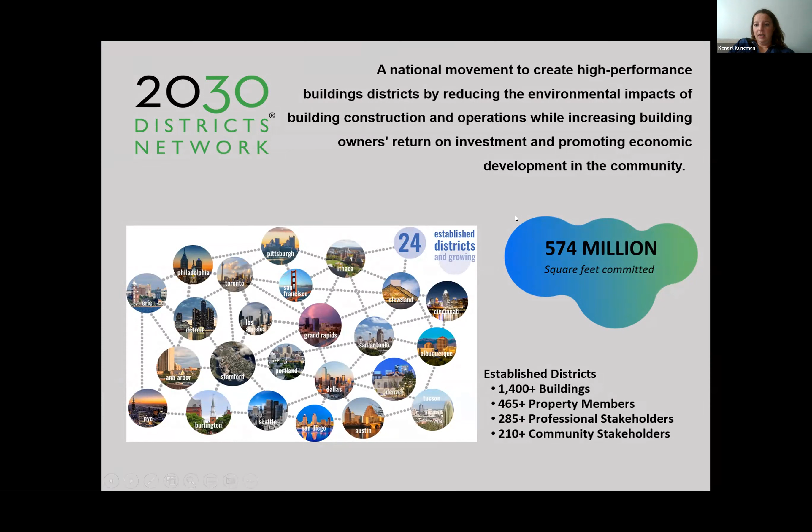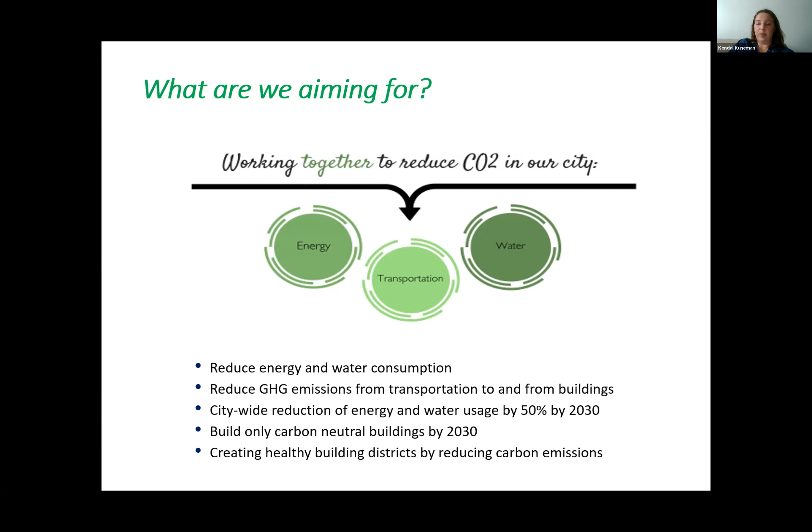If you're not familiar with what the 2030 district does, we're aiming to support our building members in reducing their energy and water consumption. We also help them reduce greenhouse gas emissions from transportation to and from those buildings. So what we're looking at is the baseline energy and water usage, and helping those building members reduce by 50% by 2030.

So how can you join the 2030 district? We do have 3 membership types. Our property owners and managers can sign up to become building members, and it is free to them. We are a nonprofit, so all of our resources are focused on our building members and supporting them in their goals. And then we also have professional stakeholders.

Those are paid memberships, and those are our stakeholders that believe in the mission of the 2030 district and support us with funding. And then we like to highlight our professional stakeholders at some of our events like today, and bring some of these topics that we think are going to be helpful for our building members to everyone.

And then lastly, we have community stakeholders, which I already mentioned. Those are other like-minded environmental nonprofits in Detroit that we partner with.

We do have 3 best practices groups: Venue Museum, which is a national group now, houses of worship, and multifamily. These groups meet about every other month and focus on some of the challenges that their building type faces. So it's been really successful getting similar building types together to have some of these discussions.

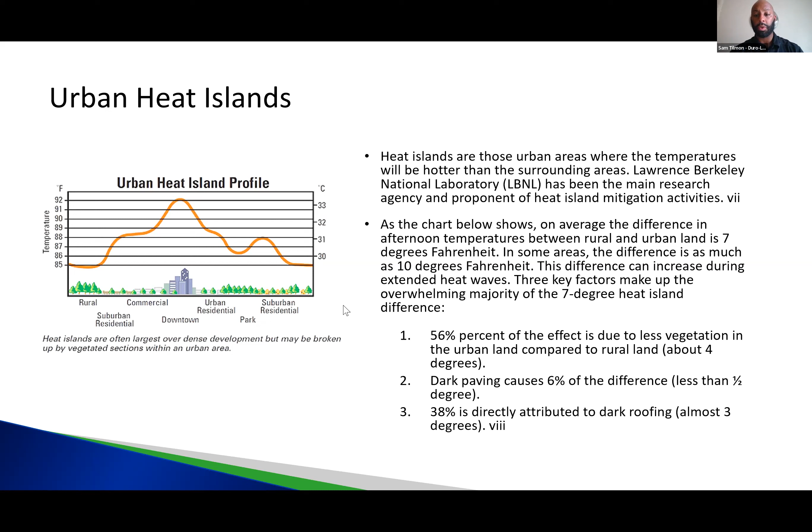One thing to note is that 56% of this effect is due to less vegetation in the urban lands compared to in your rural lands. Dark paving—our asphalt parking lots, our asphalt roadways—those darker surfaces tend to be hot. I do have a graph you'll see a little later that shows a thermography image of a piece of property showing the building and the parking lot, so you can see how hot that pavement is compared to, let's say, the vegetative grass or trees next to it. And lastly, 38% is directly attributed to dark roofing. There's a couple different kinds of dark roofing out there, from black single-ply roofing membranes to old school tar roofs, or some of our built-up roofs that have black coatings on top.

So understanding what the heat island effect is, how it occurs, how it affects us, we have to begin to look at some of our solutions to heat island effects. One of the things I'd like to point out is that most solutions we have are not quick, short-term solutions. Some of their benefits and effects take place over a longer period of time, so it's more of a long-term strategy. Adding vegetation can definitely help your roofing system and help the ecosystem. However, it's long-term—it can require up to 10 to 20, sometimes even 50 years, to completely reap all of the benefits of adding these new vegetative roofing systems.

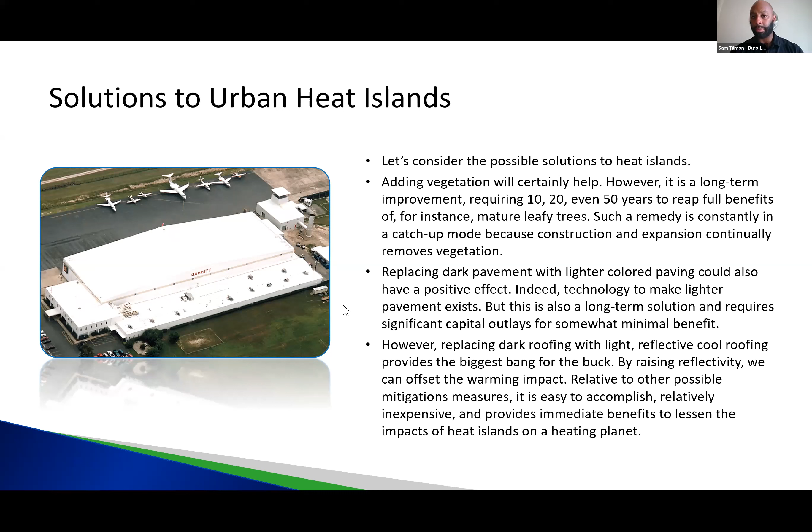Other things you can do: replacing dark pavement with some of the lighter colored pavement—maybe going from asphalt to concrete, which may be a lighter color—that can help as well. Or replacing some of your darker roofing units with more cool roofing units. Now, on direct temperature it has an effect, but it also has other benefits to your building and its equipment, which I'll cover a little bit later.

So cities growing, cities getting hotter. Cities are growing, of course, at an incredible rate. I know here in Detroit, we've just been seeing astronomical economic growth—there's new buildings popping up in the downtown area, and in our suburban area or just outside our downtown area we're seeing new strip malls, new apartment complexes, new residential units. There's so much growth happening, but it does sometimes have an effect on heat island effect or heat trap within our communities.

So if you look at any particular landscape, roofs can be about 25 to 30% of the total city area. If you're looking from the sky down at all the buildings, rooftops, parks and fields, about 25 to 30% of it is probably made up of the roof of some sort of building.

Now, with that being said, we can look at these roofs as also being part of the solution towards hot cities. Roofs tend to be replaced more often than you'll do a complete retrofit of a building. You may have a building that's built, and historically you may have to replace the roof every 10 to 15 years—now of course we see more 20, 25, and 30-year roofing solutions. But typically you're going to replace that roof 2, 3, 4 times before you actually completely retrofit the outside of the building or tear it down and rebuild.

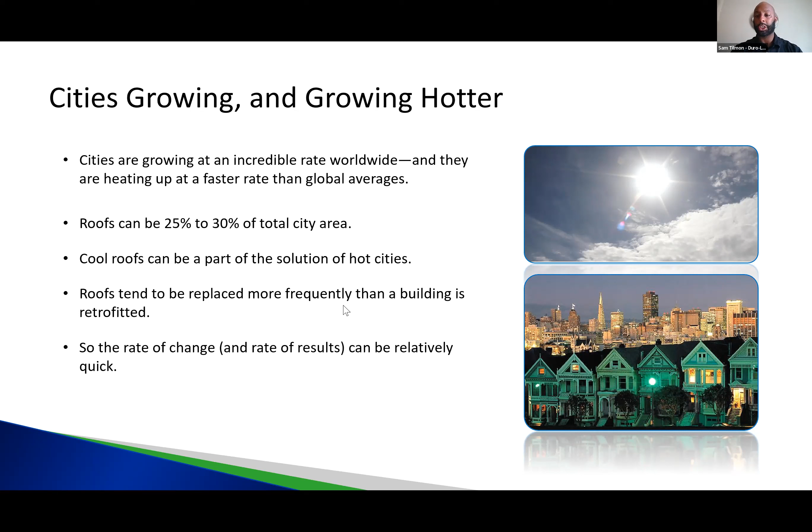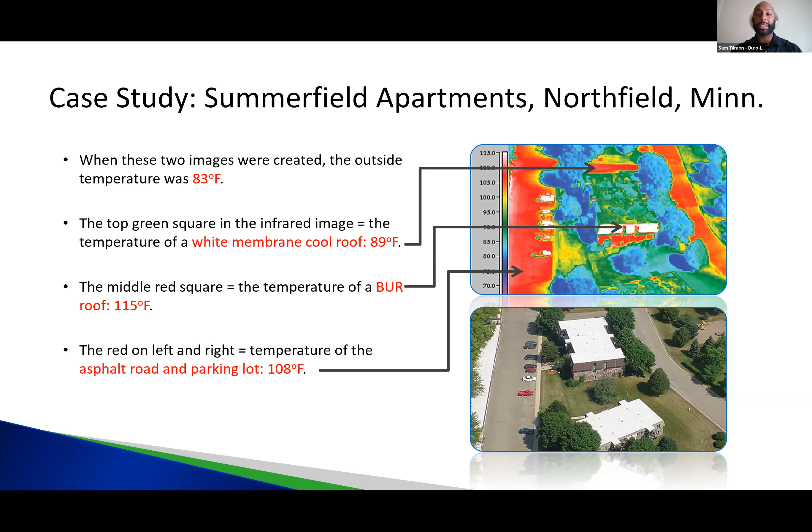So with that, I think we have a good picture of what we see from the heat island effect and how various surfaces can have effects on any particular building or its surrounding environment.

My focus today is on the cool roof aspect of combating the heat island effect in urban cores. The most effective approach to me is looking at cool roofs. Cool roofs are highly reflective surfaces that direct solar heat away from the building and back into the atmosphere. Cool roofs have been available in the US for more than 25 years, though I can tell you personally they've been around for more than 40 years. The company I work for, Duro-Last, founded in 1978, has been manufacturing white membrane since our inception.

Flat roofs, cool roofs, and membrane roofs are a lot more prevalent now. If you look at some of our European markets, they've been in this industry for quite some time.

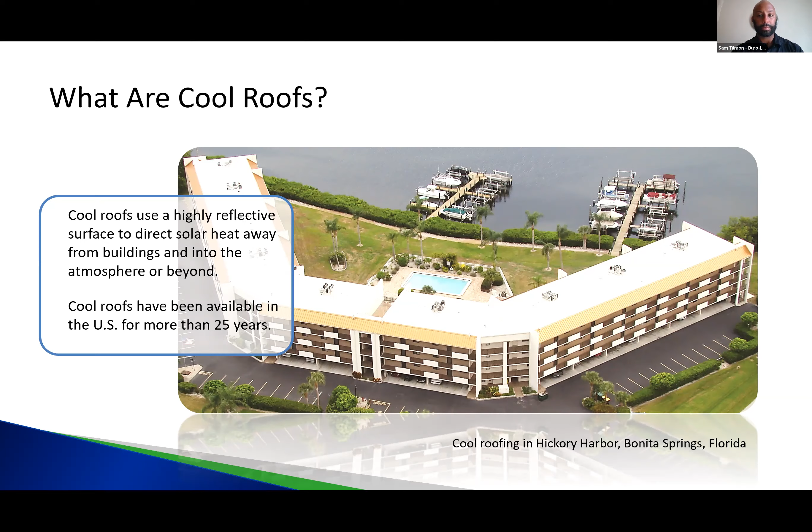So what makes something a cool roof? By industry standards, cool roofing reflects 50 to 70% of solar heat away from the building. You can get some membranes with solar reflectivity up to 80%, or even as high as almost 90%. Our company's standard white membrane has about 87% reflectivity initially.

Cool roofs can be achieved using a wide variety of roofing technologies. It can be single-ply membranes, a cool surface modified asphalt system, or even metal panels. You can go with a white coating or white paint system on top of your metal roofing system that makes it more reflective, bouncing the heat away.

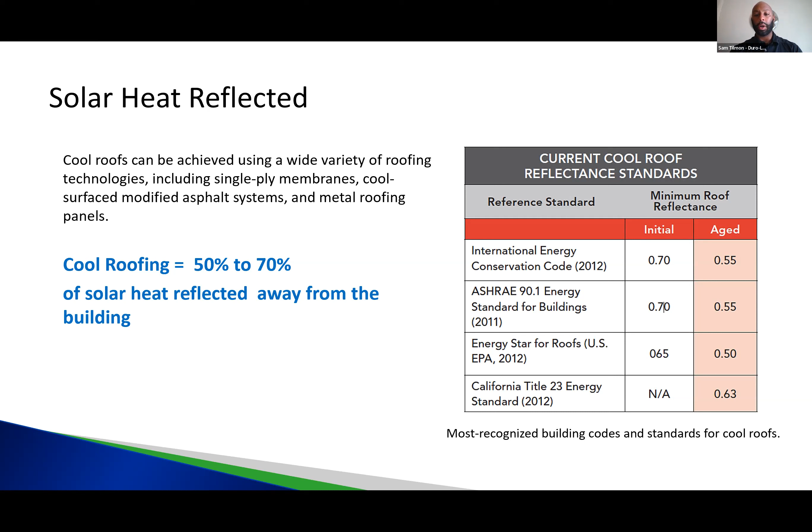If you look at the chart to the right, it gives you more data on cool roofing systems. It tells you what the International Energy Conservation Code is as of 2012 - it must be at least 70% reflective initially. ASHRAE says the same thing. Or if you go with Energy Star roofs or the US EPA system, it's at least 65%. California, we won't dig too much into - it's a totally different monster to deal with. But in Southern California, they are really big on reflective roofs.

So for cool roofing, here's what your primary goals should be if you're looking at going with a cool roofing system. Number one, you want to design and construct a watertight roofing system. Your roofing system can be as reflective and as cool as possible, but keep in mind, the most important job of your roofing system is to stop water from getting into your building.

Then you want to look at designing and building a superior building with all of its other components. You want to create a healthier environment for occupants. There are some roofing systems that use a lot of chemicals and adhesives to install, which can have high VOC counts and may not be as pleasant for residents or people in your building during installation. You want to create a more comfortable environment for occupants.

Where I see this a lot is with warehouses, factories, or buildings that might not be cooled off in the summertime. If a building's roof doesn't have insulation or a cool roofing system, these plants, factories, and warehouses can get super hot in the middle of summer, and we're trying to run fans and open doors just to make it manageable for employees and people inside. A great solution could be adding some insulation along with a cool roofing system. By having that cooler roof, it won't get as hot inside your warehouse, factory, or plant.

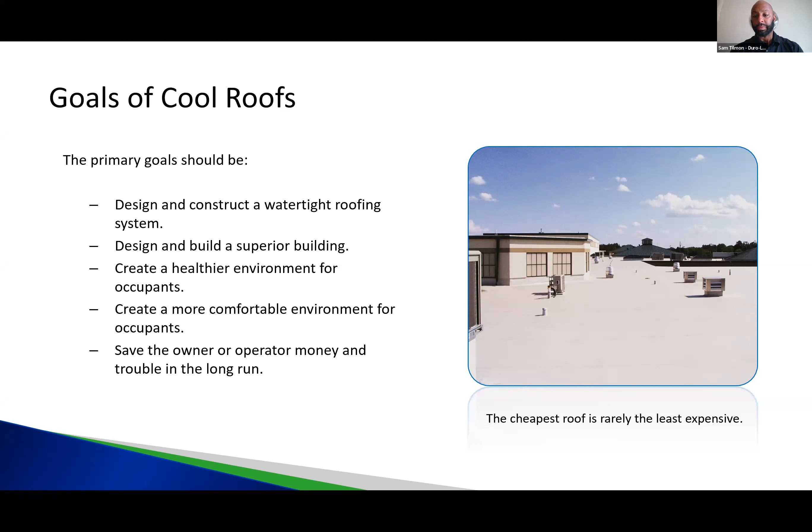So, some of the features of cool roofs.

Insulation is 25 to 50% more effective. So you want to look at what the insulation is on your building. If you have a conditioned airspace building, Michigan's building code requires at least R30 insulation. That's the first place to start: how much insulation do I currently have, and what do I want to go up to? I'd say shoot for at least an R30 insulation.

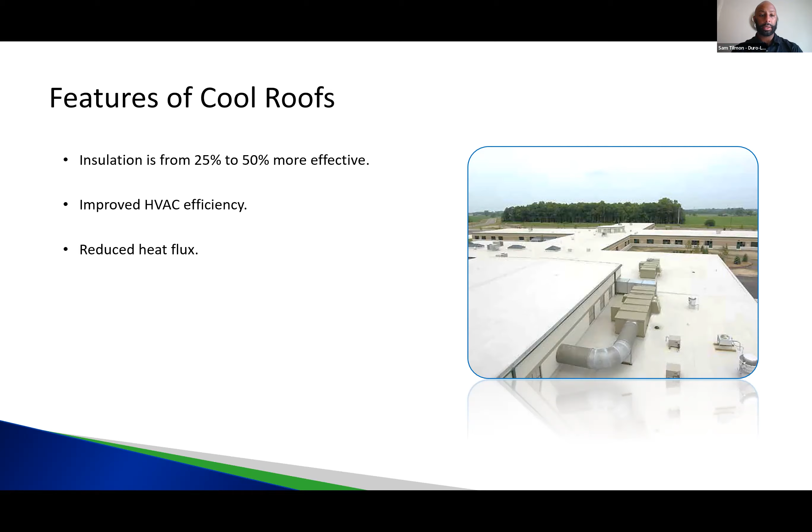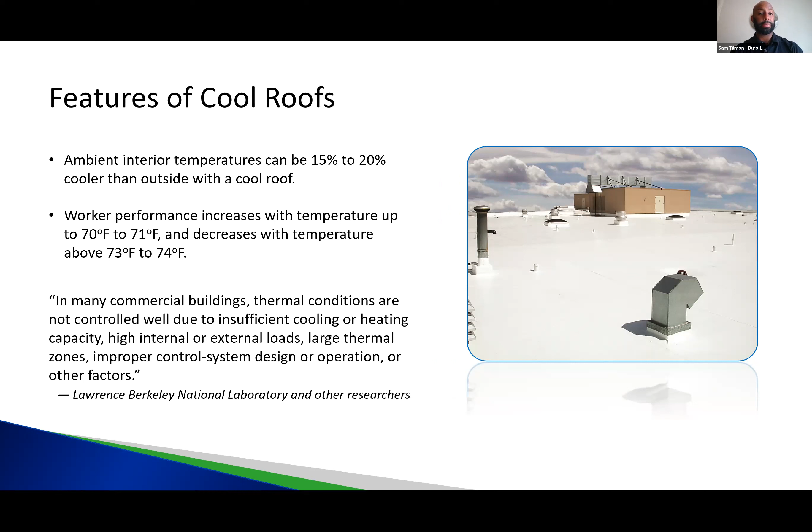Other features of a cool roof: ambient interior temperatures can be about 15 to 20% cooler than outside. Workers' performance can increase in temperatures from 70 to 71 degrees. Once you get above 73 or 74 degrees, people begin to be irritated, and you lose the effectiveness of your employees.

Another thing to consider is that a cool roof reduces your energy use and consumption during peak demand. If you're a DTE consumer trying to cool your building in the middle of the day, those are peak hours when energy rates are higher. With a cooler building, you spend less money on energy during peak demand.

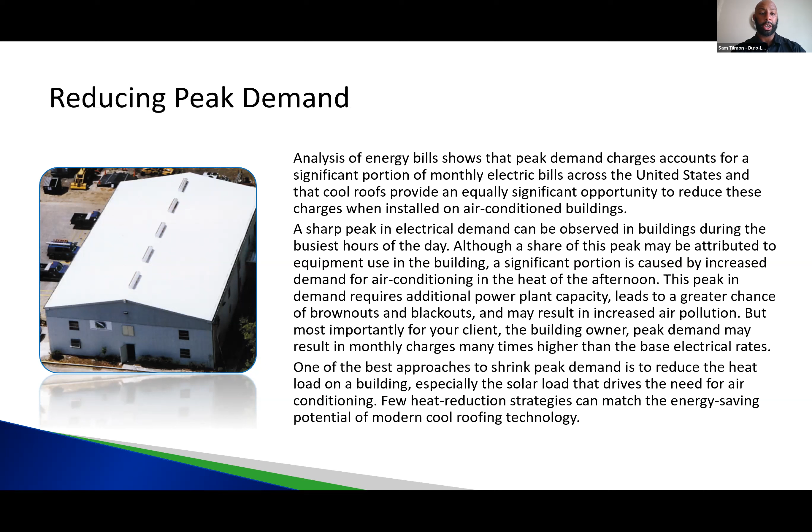So, things to consider. A couple of things we look at with cool roofs are a white membrane roof, solar systems on top of roofs, and green or vegetative roofs. Number one, if you're putting a solar system or vegetative system on your roof, make sure the life expectancy of your roof matches the life expectancy of that solar or vegetative system.

What you don't want to do is put a 15-year roofing system under a 30-year solar system. Fifteen or twenty years in, you'll need to replace your roof, but your solar system is still good, and you'll have to pay someone to lift it out of the way - or move your vegetative roof - to install a new roof. Make sure you work with your roofing team when considering solar or vegetative systems so the roofing system's lifespan matches. You very rarely want to put a solar system over an already existing roof, because its remaining life expectancy may only be 5 or 10 years, and it's expensive to remove solar and vegetative systems to install a new roof.

The next thing to look at is the weight load of the pedestals or racking system of your solar or green roofing system. I always recommend, if you're installing a solar system or racking system, adding a hardboard or cover board over your insulation. This gives more strength and stability to prevent the weight of the system from crushing your solar system or your insulation.

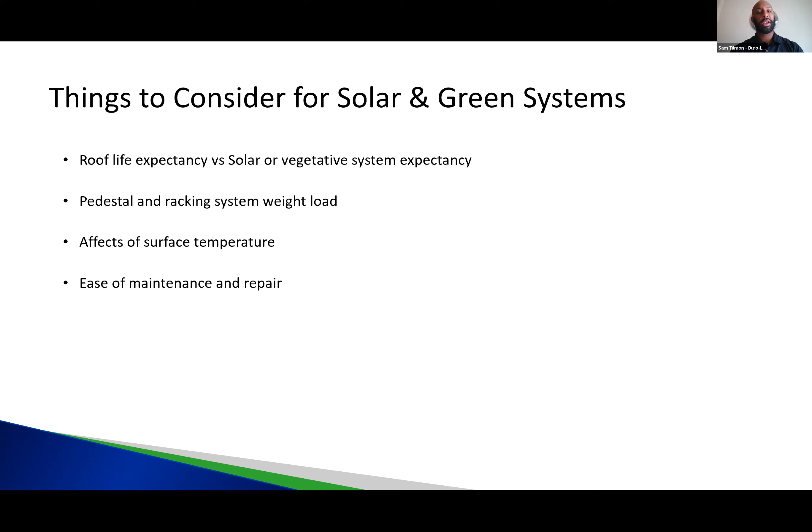The last thing I'll say before we go to conclusion is take a look to see what requirements there are in your urban core. Many urban cores are now instituting a tax incentive, a tax penalty, or some type of requirement where if you're changing out your roofing system, you must go with a cool reflective roof or some type of vegetative system. You're going to want to know what those requirements are, or what penalties there may be if you choose to go with something different.

So in conclusion, architects have long been leaders in reducing heat and air conditioning burdens caused by buildings, so have these discussions with your architects. Installing a cool reflective roof deflects solar heat from reaching into your building, thus reducing your cooling needs.

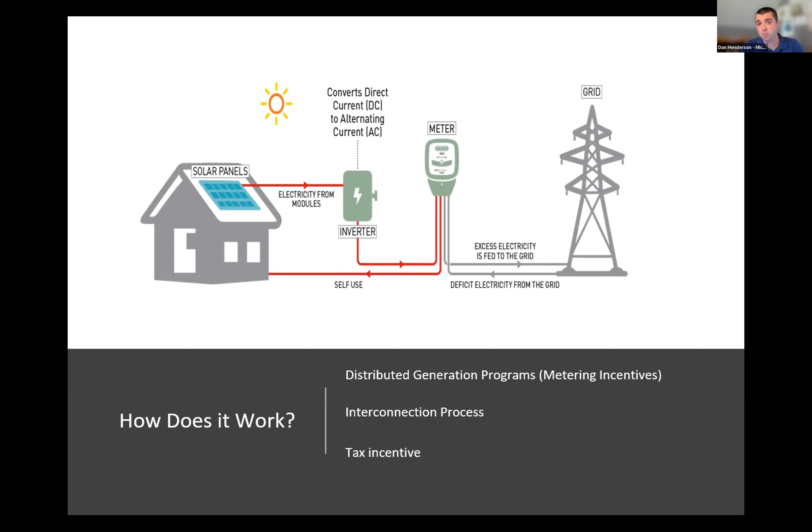The most well-known is now the reinstated 30% federal tax credit from the Inflation Reduction Act, as it was scheduled to drop to 22% next year. If it's a business purchase, there will also be some depreciation in the form of a federal depreciation and a state level modified accelerated cost recovery system. These can oftentimes be around 40-45% of the total purchase price for a commercial sized project.

All right, let's dive into the actual value streams. And the first and foremost is going to be cost savings. But the primary function, it's a cost offset opportunity, not a revenue generator.

So if it's going to be a behind the meter solar installation, part of that interconnection process is getting the approval or good graces from the utility. And their stance is that we're allowed to provide a solar array that's going to produce 100% of your annual electric needs. We're not allowed to go larger than that.

As the seasonality we will experience here in Michigan, we are likely to see kind of an arc in production, with the winter months, November, December, January, and February, accounting for about roughly 15% of your annual production. It's the spring, summer, and fall that we really optimize these systems for that production.

And it's often common practice to do a pre-solar installation and a post-solar installation inspection from the roofing manufacturer to keep the warranties in place.

Value stream number 2 is going to come in the form of marketing. And I think there's a tremendous amount of opportunity here today for businesses, being a green supplier or distributor, being a good steward of Michigan.